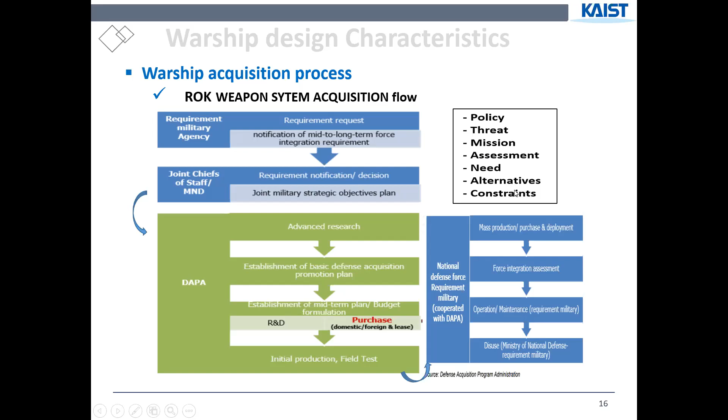For this stage, they consider the policy, threat, and mission assessment, and alternatives and constraints needed there. This is the simple warship acquisition process.

Comparing to the commercial ship, the warship capability acquisition process is very complicated and long term, about 8 to 10 years needed to finish one ship delivery: feasibility study, concept study, basic design, detailed design, and construction. Normally the feasibility study is Navy-led, and the concept study is DAPA and Navy-led, and after this, basic design and detailed design are shipyard-led.

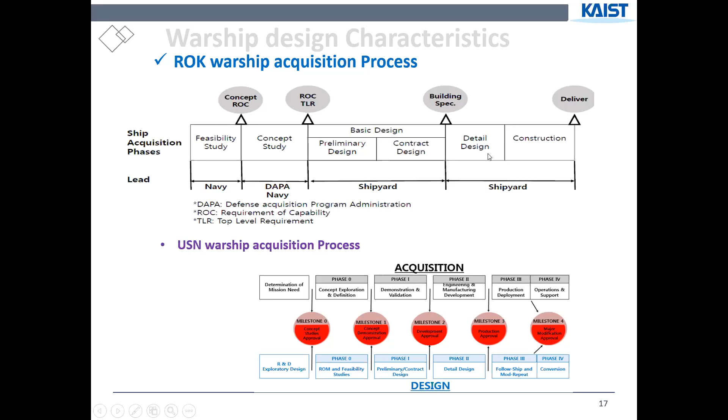This early stage is very important because much requirement flexibility is needed. In the design stage, the feasibility and concept studies take about 2 to 3 years, and 3 to 5 years. Especially the initial design stage is very important. Even though the cost is small in the early design stages, the influence is very big. Especially in the concept design stage, the design flexibility is there. This stage is where many important requirements are frozen.

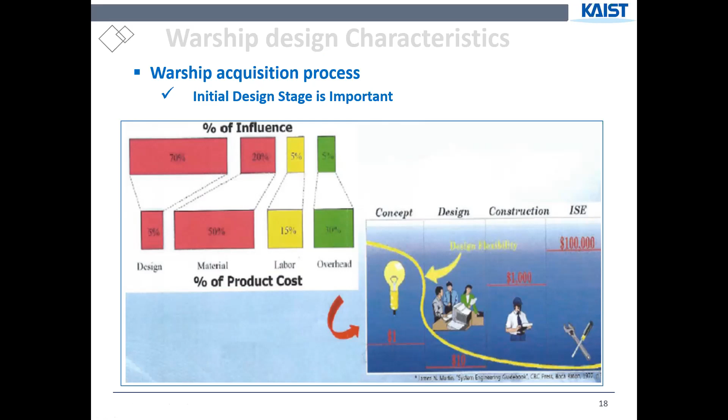And fast technology development: if we increase the risk by adopting advanced or cutting-edge technology, it becomes more difficult for the designer and shipyard to develop and test, while compressing the timeline and the budget. So there is more risk and higher cost. Normally the shipyard is not willing to accept higher advanced technology because they face more risks.

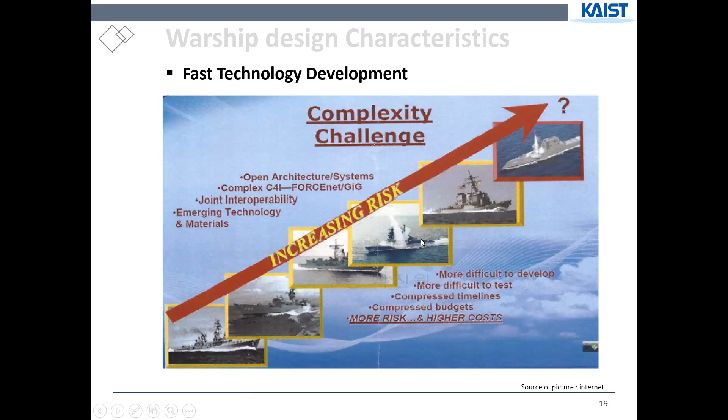But the operating Navy always requests to apply new advanced technology in the ship, so there are some troubles between the Navy and the shipyard many times.

For warships, there is a cooperation system for warship procurement with several stakeholders to design and construct the prototype ships. First, the Navy carries out the ROC, concept design, and T&E testing evaluation. Next is the Joint Chief of Staffs, who handle ROC and interoperability. DAPA handles planning, execution, and project management, and ADD does R&D support. The shipyard handles shipbuilding and quality control, and the defense agency handles technology and quality.

The shipyard cooperates with equipment system makers and combat system makers, all together communicating with each other and providing support. But sometimes they are well cooperated, sometimes not, because they insist on their own organization's or company's purposes. So for good warship performance, all stakeholders should cooperate with each other.

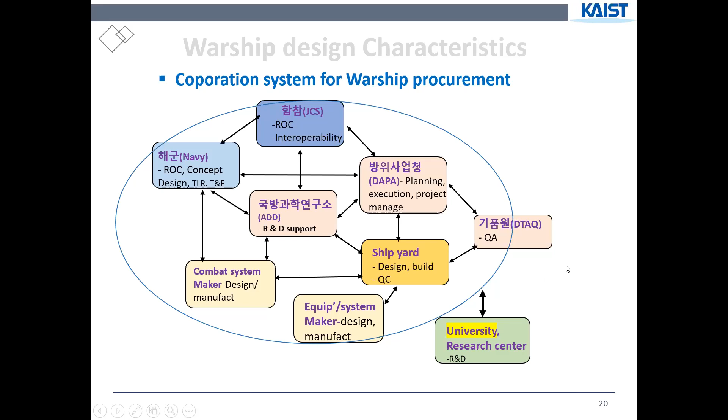Now we've finished the warship design characteristics. Any comments or questions, students? Voice is okay? 한 교수님 잘 들리세요? Yeah, sound is okay. Good, quality is good. Okay, if no questions, let's go to the next chapter to save time.

Warship design trends: enhance total ship survivability. First, reduce susceptibility. Susceptibility means the inability of the ship to avoid the sensors, weapons, and weapon effects of a man-made hostile environment. To reduce susceptibility, we use operational advantages, signature control, stealth ship design, and reliable self-defense systems.

Next is reduce vulnerability. Vulnerability means the inability of the ship to withstand the effects of the hostile environment, or what type and how much damage the ship can take. To reduce vulnerability, we use operational advantages, zonal design, and optimal arrangement and protection against hostile weapons.

Finally, enhanced recoverability after being hit by an enemy's attack. If our ship is damaged, enhanced recoverability includes damage control, fire and flooding monitoring, damage recovery, replacement, and maintenance. In severe conditions, if we must discard our ship, crew evacuation and escape is needed. So these three components should be considered to enhance total ship survivability.

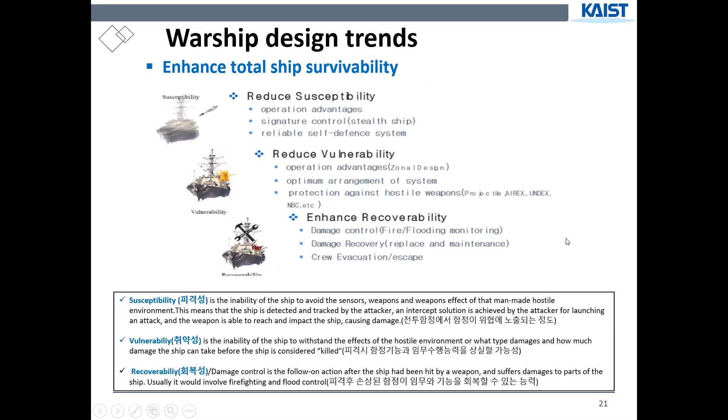For survivability, consider the radar cross section. Radar cross section means a target transmits some radio electrical signals to our ship and it gets reflected as the radar cross section. To reduce radar cross section, there are three things to consider.

One thing is the shape of the ship, which should be simplified with flat planes. Next is the inclination of the surface. For a right angle surface, if the enemy transmits radar signals perpendicular to the face, it reflects 100%. But if the surface is inclined, the radar signals reflect away, so very low radar cross section is achieved. This is without stealth design, and this is the stealth design radar cross-section signals.

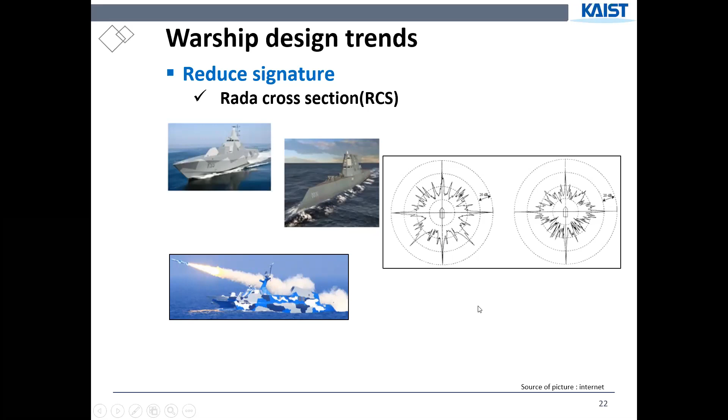And reduce the infrared signature. Infrared means the mid-infrared and far infrared. Any object emits some infrared signals. So mid-infrared is generated from the funnel hot plumes, and the far infrared is the surface ship surface temperature.

By using the engine exhaust suppression system introduced, the mid-infrared signal is reduced, and by using some cooling system or spray system with water, the surface temperature can be reduced. This is the without-suppressed infrared signals, the medium infrared suppressed systems, and the advanced infrared suppressed systems.

In the missile attack, at the beginning the missile tracks some radio signals, but finally it homes in by using the missile's homing through the hot spot of the funnels. And this far infrared signal is also needed for classification.

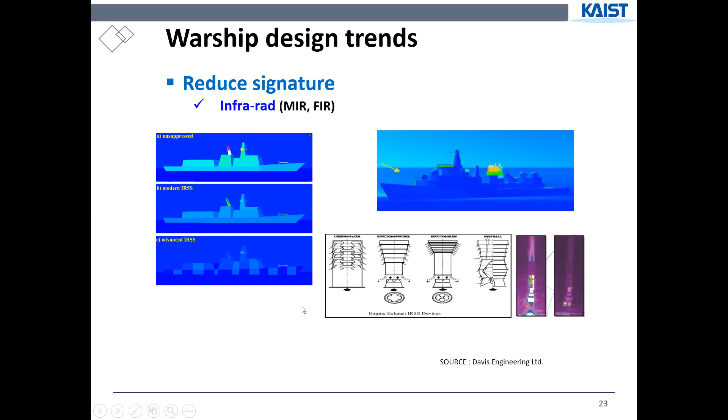And the next is the underwater radiation noise reduction. This is the engine, generator, and drive motor, and the reduction gear and propellers. These are propeller systems, but the main radiation noise is generated by the engine, the reduction gear, and the propellers.

So to reduce the noise, we can make elastic mounts and absorbing shields, acoustic shielding, and absorbing materials, and cavitation noises should be reduced as well.

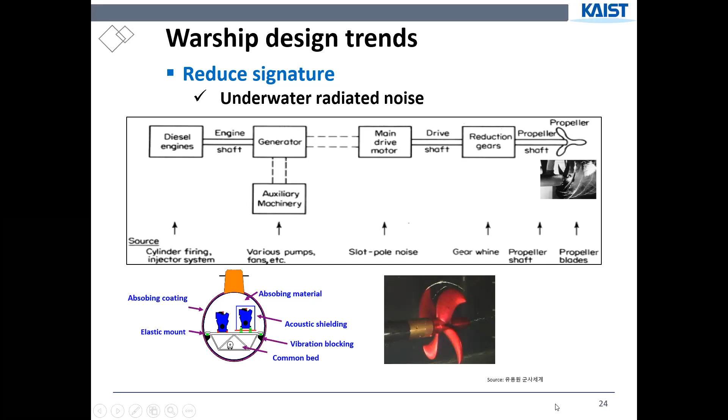And electric propulsion systems: this is a hybrid propulsion system, and this is the total electric system. The hybrid propulsion system at maximum speed, high speed, uses the main engine and the reduction gear and the propeller. At low speed, they use a generator and motor and propeller.

The fully total electric system, from low speed to high speed, uses the generator and the motor and propulsion systems. This has the advantage of power flexibility, reducing underwater radiated noise, and improving survivability.

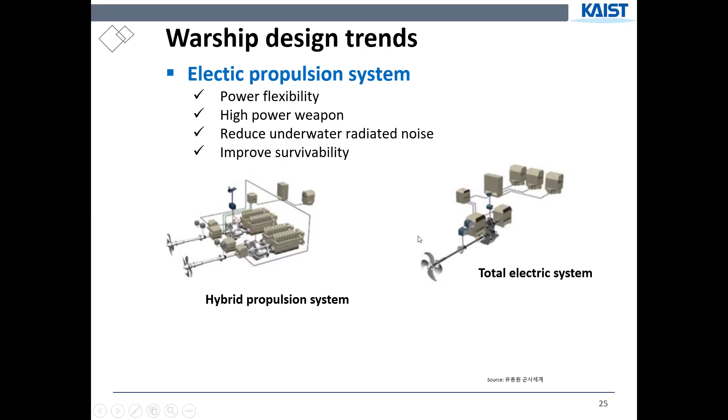They also consider shock proofing from underwater explosions, near field explosion and far field explosion. Normally the ship designer does not consider near field explosion, because if we consider it, our ship structure becomes very heavy and strong, so the weight is too high. So near field explosion is not considered during design.

Only the far field explosion is considered. Far field explosion is the shock proofing of the equipment, the anti-shock performance. So all naval ship designers consider the far field explosion.

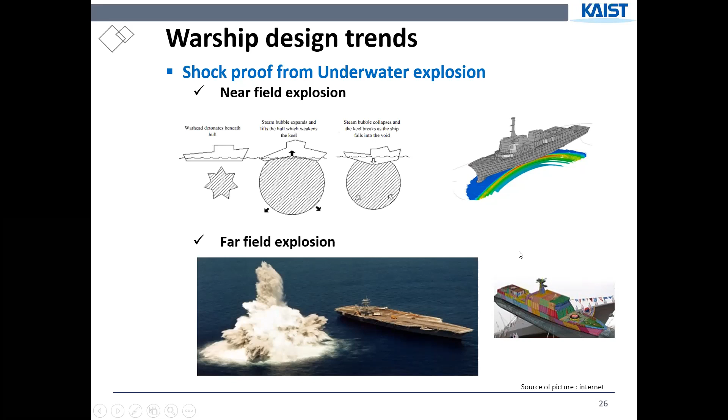And the integrated mast systems. This is the conventional mast system and arrangement here. This is the new type of arrangement.

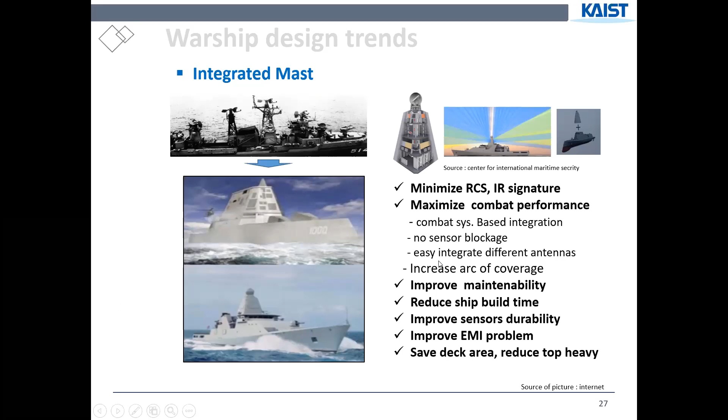Another trend is modular design for multi-missions. In the past, many navies built new ships according to each mission itself. For example, for anti-submarine warfare they built destroyers for anti-submarine missions only, and for anti-air warfare, AAW, they used other destroyers for that mission.

But these days, many navies, especially not rich navies, use multi-purpose platforms and carry out multi-purpose missions. As you can see, this is the LCS, Littoral Combat Ship, in the United States. They carry out many functions and missions.

The advantage is very cost-effective ship design, because they can use the multi-purpose design.

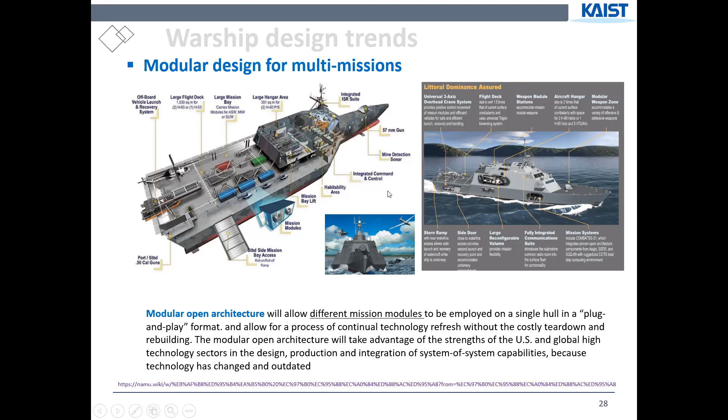Another trend is the combat system: augmented reality, open systems, and artificial intelligence aids, all together forming the new combat system concept. Details are in here, so our students can read this quickly.

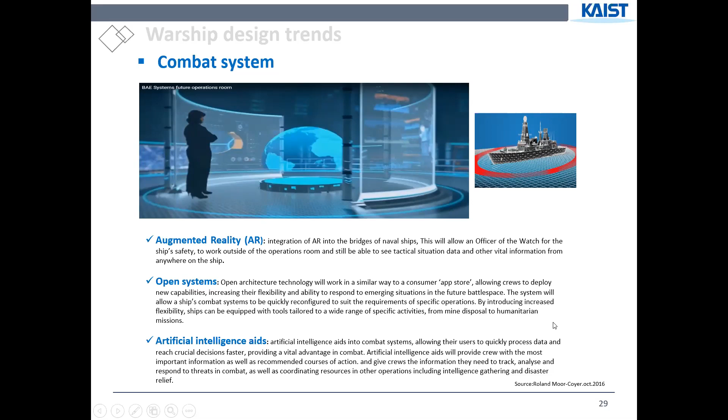Up to now, we briefly reviewed the warship design trends.

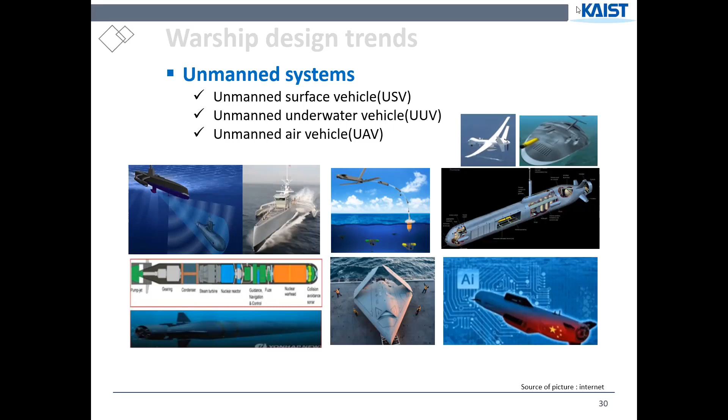Next, we are going to look at some examples of the new ship design trends. First, the most advanced destroyer in the world among existing ships, the Zumwalt class DDG-1000, is a very advanced ship.

Before explaining many things, let me show the YouTube video.